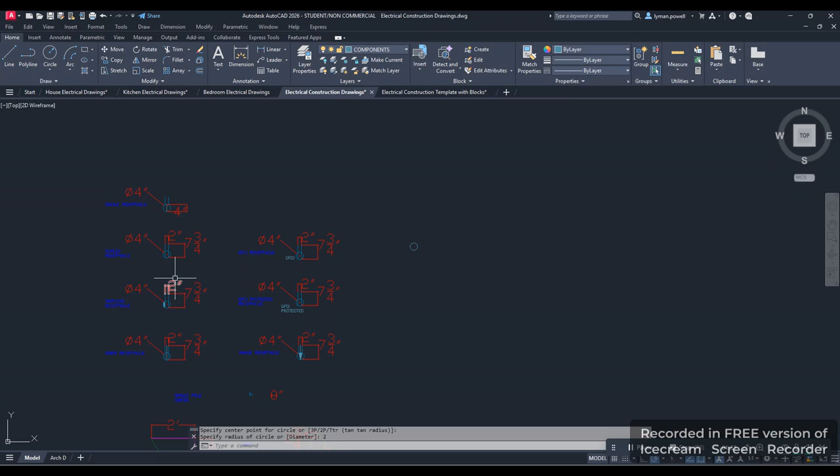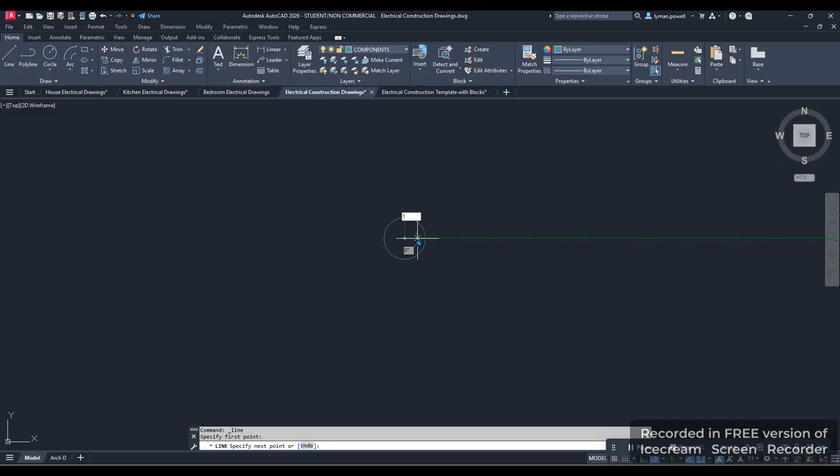Now you notice these lines here are 7 3/4 and they're 2 inches apart. So I want to zoom into this a little bit and draw some lines to help us orient our two other lines coming out of that. I'm going to draw a line starting at the center of our circle and go over 1 inch. If I type in just 1 and hit enter, I'll put my line at 1 inch. Then I'm going to go back in the other direction and type in 2, which will give us a 2-inch space between our two lines.

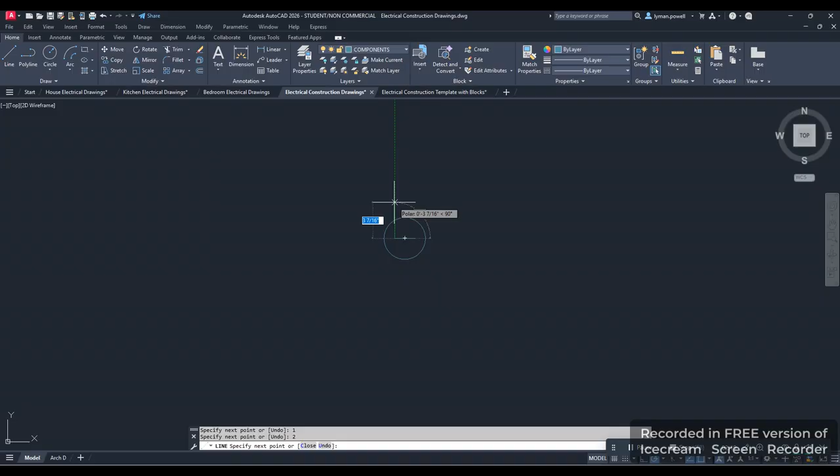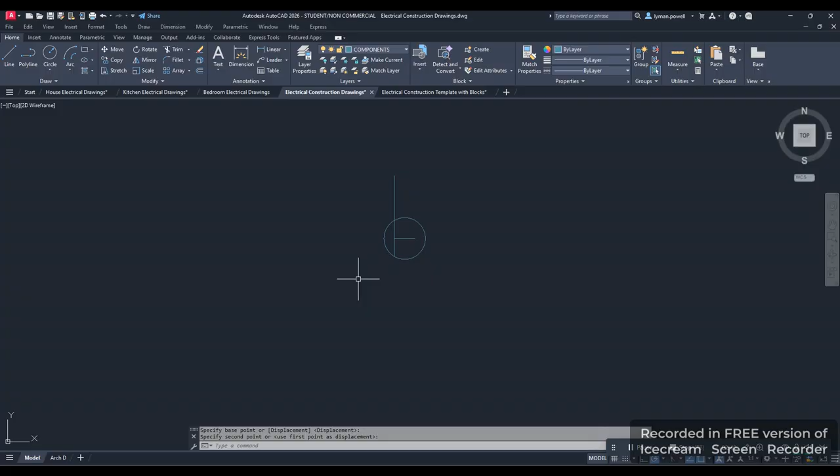Then I'm going to come in the vertical direction and go 7 3/4. I'll type in 7.75, which would be 7 3/4. Then I'm going to hit escape, but our line is not exactly where we want it. So I'm going to select our line and hit move, go to the end point of this line, and drag it straight down until we get to the intersection of our circle. That will be our first leg of our receptacle.

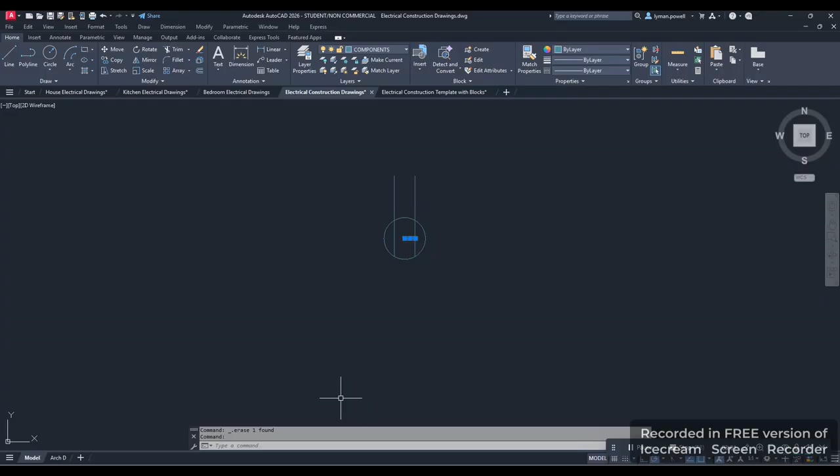Then I'm going to highlight that line again and hit copy this time, and go from one side of our original line to the other side, and that will be our duplex receptacle. I'm going to delete these lines that we used to get our spacing correct. So that is how we're going to draw our duplex receptacle.

Now, before we get carried away, what I want to do is make this a block so that we don't have to redraw it every time. We can just select our blocks from our block table and insert that into our drawing. So I'm going to highlight the receptacle we just made and hit create. I want to call this a duplex receptacle. And you notice my typing has not gotten any better since I started this course.

I have the object already selected, so you should not have to select this. You should have nothing else selected here. But it should be converted to a block, and it should allow for exploding, because we may want to modify it later. If we don't allow it to be exploded, we cannot modify it later. Then we're going to specify the point, and this is on screen. This is what we mess up on a lot, because when we click OK, we're not quite done yet. The block has not really been defined. So we are defining this as a block, but we have to give it a base point on the screen.

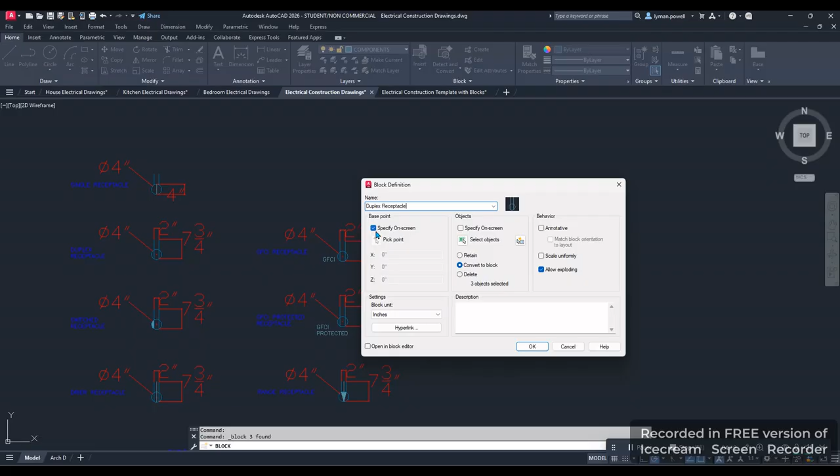So we have to hit OK, and you notice we got our cursor here. I want to select the end of our line here, and that will be where our block will be added to our drawing. So I'm going to select the end point, and now our block is made.

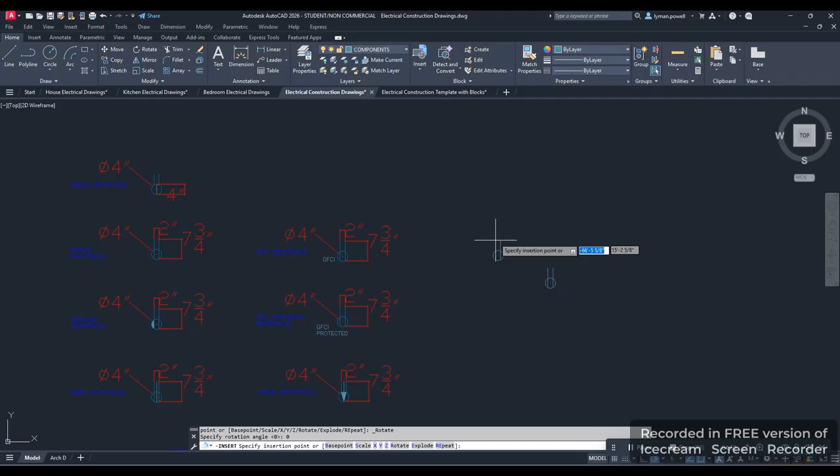And you notice when we click on it, that point that we just selected is where that block is going to be moved from. And you'll also notice if you go to our insert blocks, we should have a duplex receptacle there. You click on it and drag it, and it will go to that point that we had it selected as whenever we selected that block.

So once we have our receptacle created as a block, we can create the rest of these as blocks, or it's fairly easy to modify this to some of these others. So you can choose whether you want to make them blocks or if you want to create them on your own. But I will show you how to make our single receptacle out of this, and I'll show you how to do the switch receptacle.

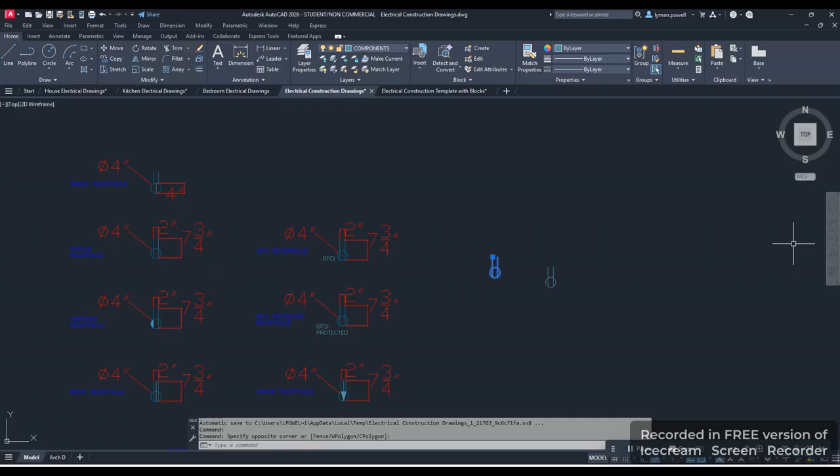The switch receptacle is really easy to modify. You don't even have to do it. So I'm going to zoom into this to show you how to make the switch receptacle first. You come up here to the top, and this is a fill, so we're going to fill this area. But I don't want to fill it as a hatch, I want it to be solid. So I'm going to click on solid. And that is all there is to do to make that as a switched receptacle.

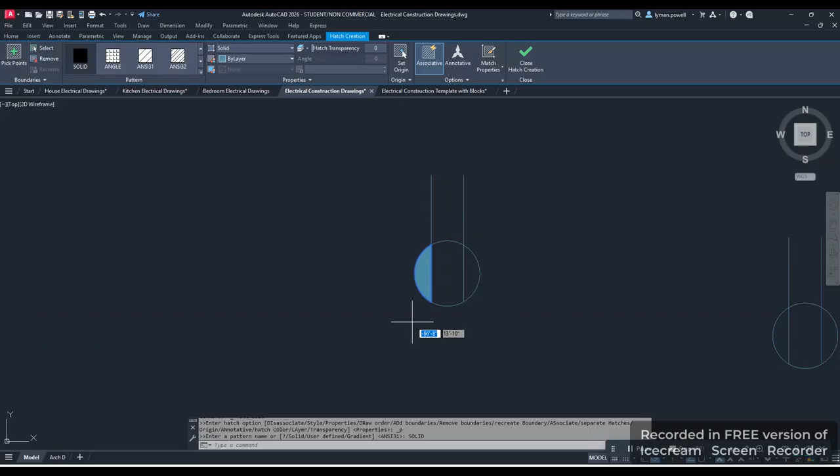Now we're going to make our GFCI. We can make a block for that, or we can just use a double receptacle and add our text to it to make it a GFCI. We're just going to click on our text, drag a box down here, and type in GFCI.

Now this should all be in capital letters. Whenever we do text in a CAD drawing, it should all have capital letters. So then we're just going to highlight that and come up here to make it a little larger. Half inch is not enough, so I'm going to do like 1.5 inches. I'm going to type in 1 and then a space. If you don't put the space in there, it'd be 11/2. So we've got 1, then a space, then a half. That will be our new text, and then we have to hit enter.

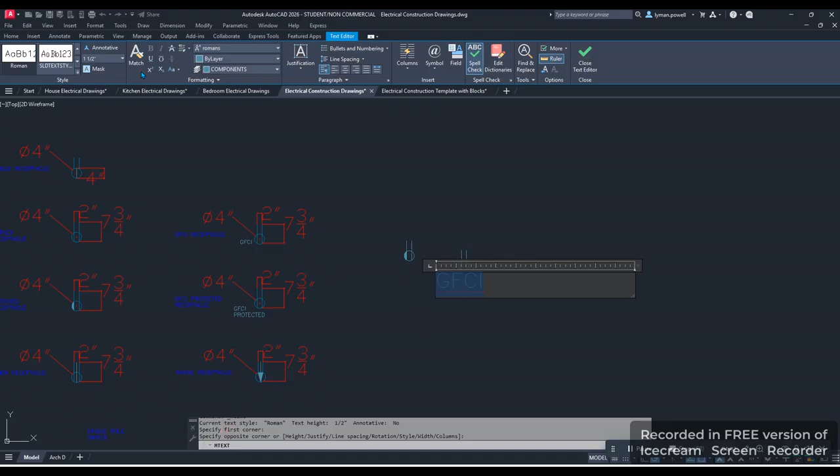That is why we leave out a lot of the time. So if you notice, the text hasn't changed. So when we hit enter, then it makes it larger, so then we can see the text. And then if we just click off of it, the GFCI will be next to our duplex receptacle.

Now, if you do want to make this a block, I would suggest taking this and moving it a little closer. It doesn't have to be oriented exactly, but somewhere close to that so we know it is a GFCI. And then if you want to make that a block, you can select the whole thing, or if you want to make just the GFCI a block, you can add that in there. But it's pretty easy to add when you do your drawing, so you don't necessarily need that as a block either, because it's really easy to make.

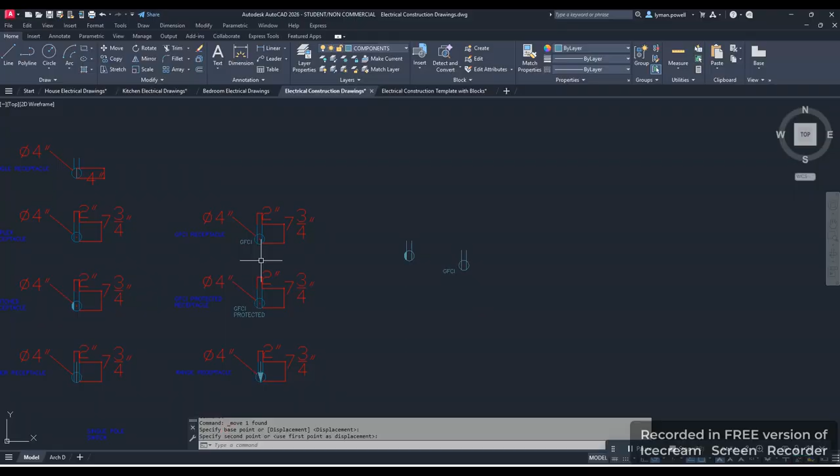And then the protected is the same thing. So this would mean that the power would come to the GFCI, and then you'd have a wire going from the GFCI to the protected circuit. So this is protected by this GFCI. So we made a switch receptacle, we made a GFCI receptacle.

I'm going to show you how to do the range receptacle. I'm going to show you how to do our 240 receptacle first. Just add an extra line in that. But you cannot just copy and drag this over. This line here is going to be a little longer. So I'm going to zoom into this one.

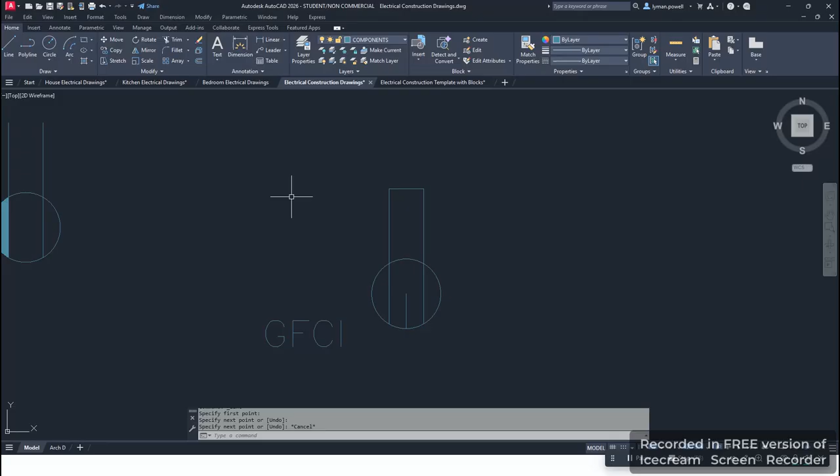And then I'm just going to draw a line, a few reference lines across here so I know how long to make it. We want to make it the same length. I'm going to draw a line from the center of our circle to the intersection of the circle. And then we can either draw another line or just lengthen this to the center of that line and delete that line. So that is a really easy way to make a 240 3-wire receptacle.

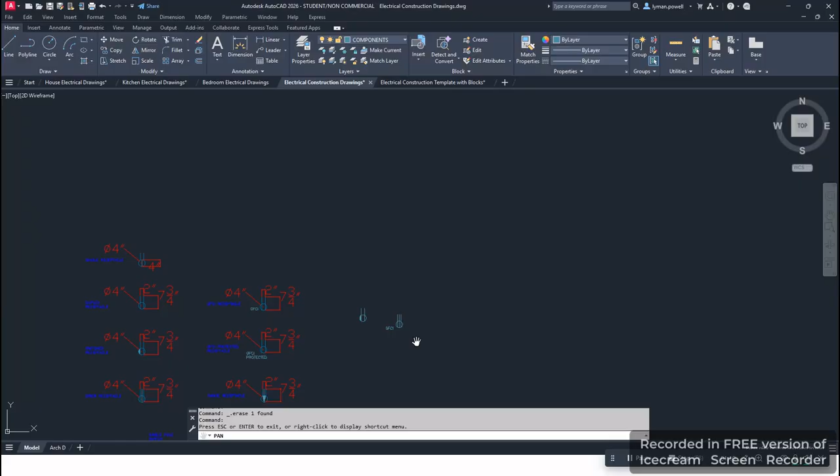And then if we want to do our range, we will just add our triangles to that. Again, I will zoom into this to show you how to do that. We will draw a line from the end point of this to where it is. We're going to go over that and then up. That's really simple, we're going to hit escape. And then again, we'll fill it. We'll click on the fill button, and we may have to fill 2 sides at a time, and it will be a solid.

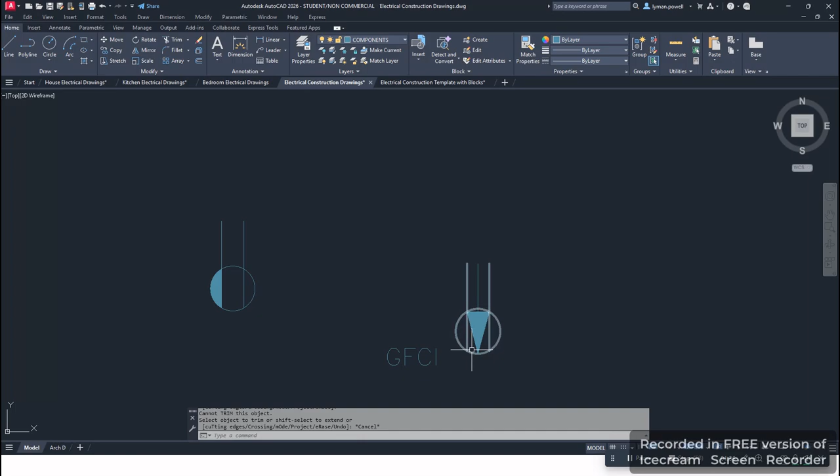We got to do one more step. I want to trim some of these lines out of that. We'll have to explode this first because it's already a block, and when we made that block, we made it so we can explode it.

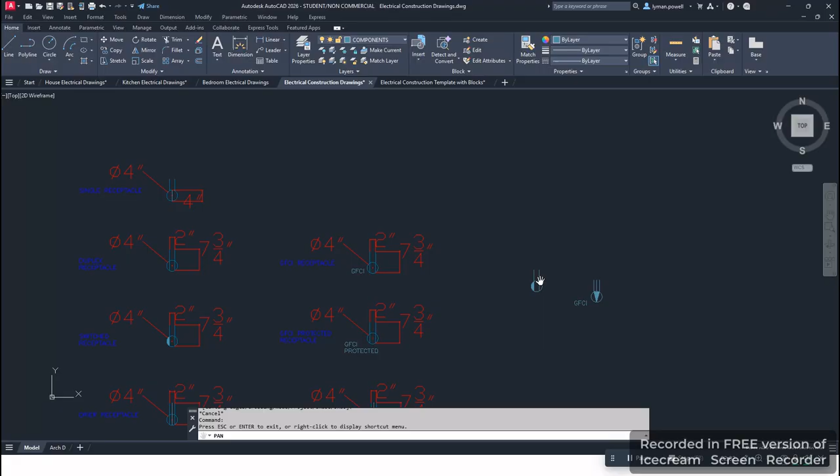So we will trim the inside of these lines, and now we have a receptacle for a range. That should be all of the receptacles that you would be able to modify. You can modify this one, you would just have to trim these 2 lines on the outside and then draw a line in the center of that. I think you'll be able to figure out how to do that.

So we're getting to the point now where I want you to start figuring out how to do some of these blocks and how to do some of this stuff on your own. So I would like for you to create these blocks, or at least be able to modify them to get them to do what you want. Okay, so we made our receptacle blocks.

Now I want to show you how to do some of our wiring blocks. Our receptacles are going to be in the components, but then I want to do some of this wiring. I want to add that in our wiring layer. You should have the wiring layer.

I will let you choose the color you want, but I'll just warn you, if you do too dark of a color, it doesn't show up here very well. If you do too light of a color, it's not going to show up over here when we do our layout. So you have to kind of pick a color so that you can see on both sides.

As you notice here, our home run is 2 feet over and 1 foot down, and then we got an arc going from one side to the other. And then I have a 2 conductor symbol here, so this would be like a 12-2 or 14-2 or some kind of wire, and this dot would mean that it's with ground.

And then I have a 3 conductor, so this would be like a 12-3 or something that might be used for a 240 volt service or for a 3-way switch. So we can probably make both of these blocks, and I'll show you how to make the block and add it into our wires as we go.

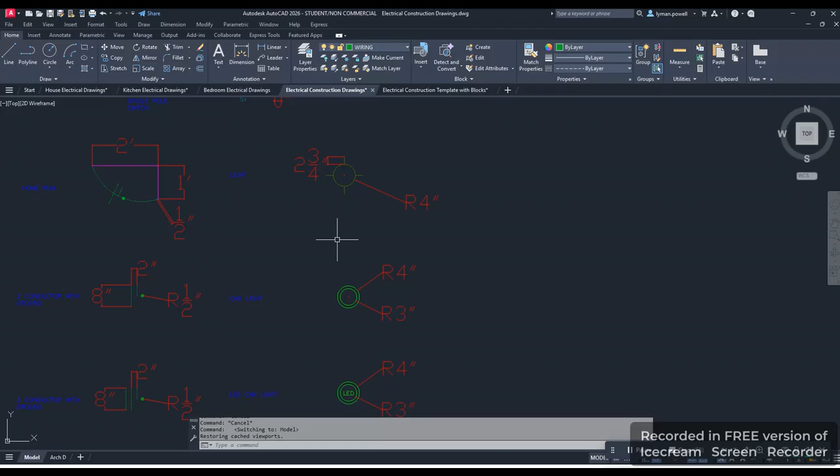I'll show you how to do the home run, and then I'll kind of let you figure out how to do the lights on your own. This is a can light, it's just got 2 circles, and it's very simple. And then the LED light is just the can light with an LED inside it.

But I will show you how to do the home run in these 2, and then I'll let you figure out how to do the rest of them. These lights should be in the lighting layer, and this should be in the wiring layer, the wiring label.

So we're going to start by just drawing a construction line. We're going to come over 2 feet, so we're just going to draw a line. I'm going to type in 2, and feet is just a little apostrophe.

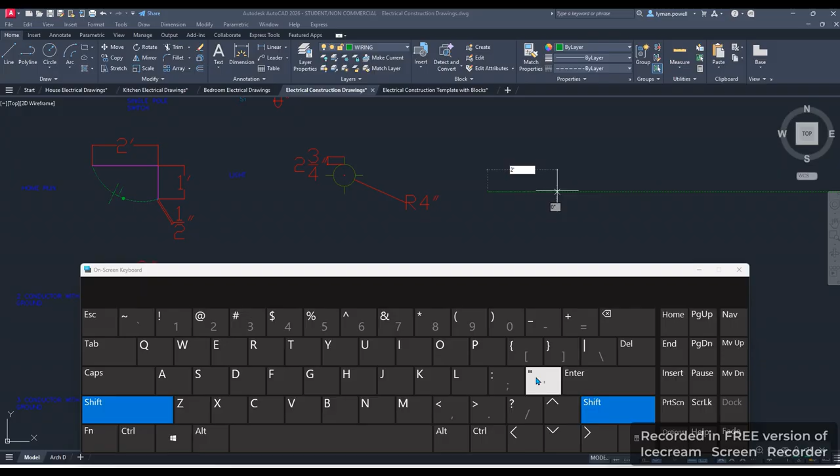I do have a keyboard on here to show you where this is, so this is just feet. If you want inches, you have to hit shift and then the quotation mark just for inches. If you don't hit shift and hit this, that is for feet. So we want to come over 2 feet, and then we're going to hit enter, and that's going to be our line. So 2 feet, enter, and then we're going to come down just 1 foot and hit enter.

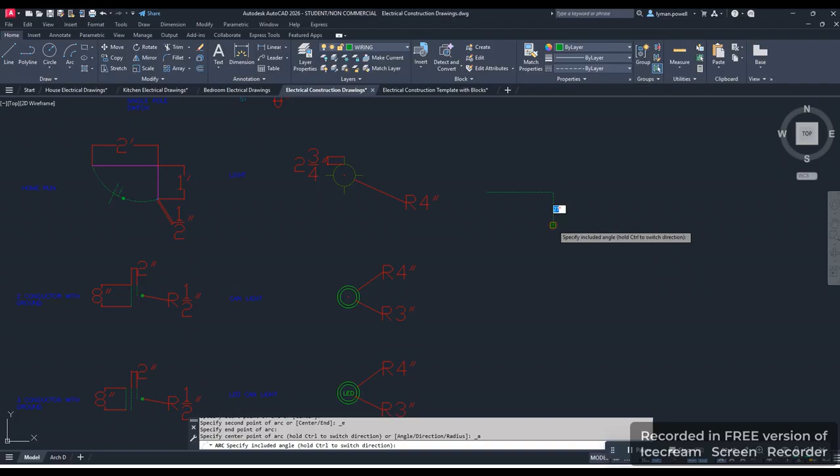So that will be our lines to lay out our arc. Whenever we do this arc, I want to come up here and select - this may not be selected for you, you may have just a 3-point arc. I want to do a start, end, and an angle. So select start, end, and angle, and then we're going to start at this point, end at this point, and then we're going to have our angle, and it's just going to be perpendicular to our line. So that will be our wire for our home run.

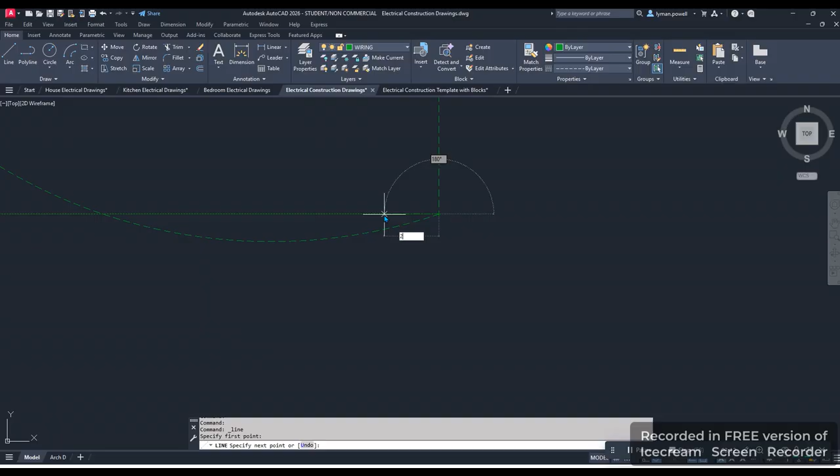Now we want to do a little arrow on the end of this home run so that we can tell that it is a home run and not just a wire. So again, I'm going to zoom into this, and I'm going to select just a wire, and I'm going to come out - now we made this on our horizontal plane. So I'm just going to make this a wire that's going to be 2 inches long. So again, I'm going to hit shift and then the quotation mark and then hit enter. So now we have the start really of our arrow.

So to finish it, I'm going to highlight it, and I'm going to do the mirror image of that, and I'm going to select the end point, and you notice it puts the arrow down on the other line, on the other side here.

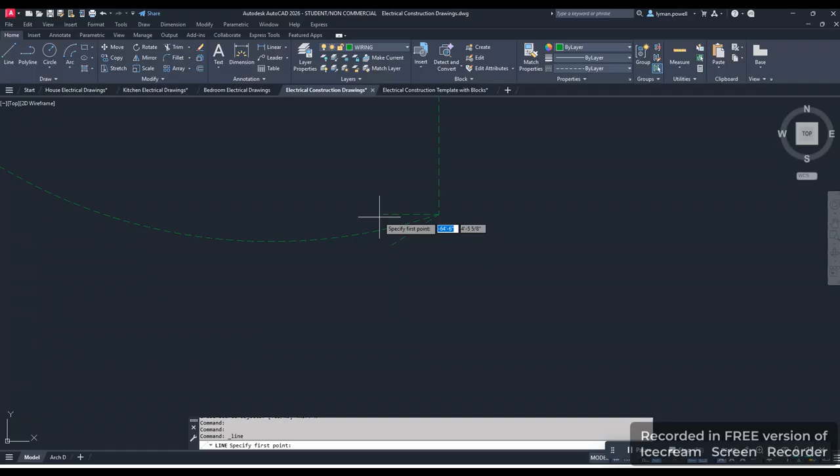So if you get it perpendicular there, then you can draw your line. I do not want to erase my source, so I'm going to hit no. Then I'm just going to make another line here to complete my arrow from the end of this to the end of that, and then we'll do another fill, and I'm going to fill in the solid. I'm going to fill my arrow. So that will be our arrow for our home run.

You can make this as a block, but I would like to add our wire numbers here so we can distinguish what line it is. I have given you some dimensions in that, and I'll show you how to draw that real quick.

So we're just going to come out here and draw a line 8 inches long, so just type in 8 inches. And then I want a 2-inch separation between these 3 points. So what I'm going to do is come up here and draw a line. I'm going to go from the center point of the line we just drew and drop in 2 inches, and I'm going to do another 2 inches for our circle. Hit enter, and that will be our 2 lines.

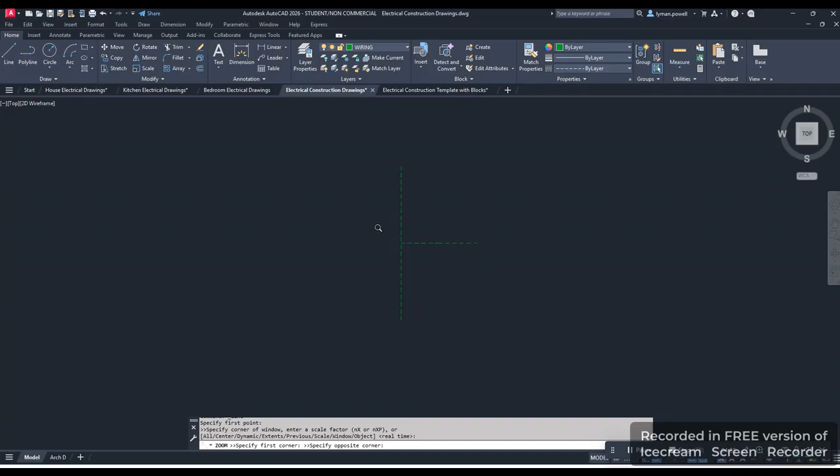In this first line, that's going to be half of 8, so I think we can figure out that's going to be 4. That will be the end point here. Again, I'm going to zoom in to see where that is. So we're going to go in and up, and that's going to be it.

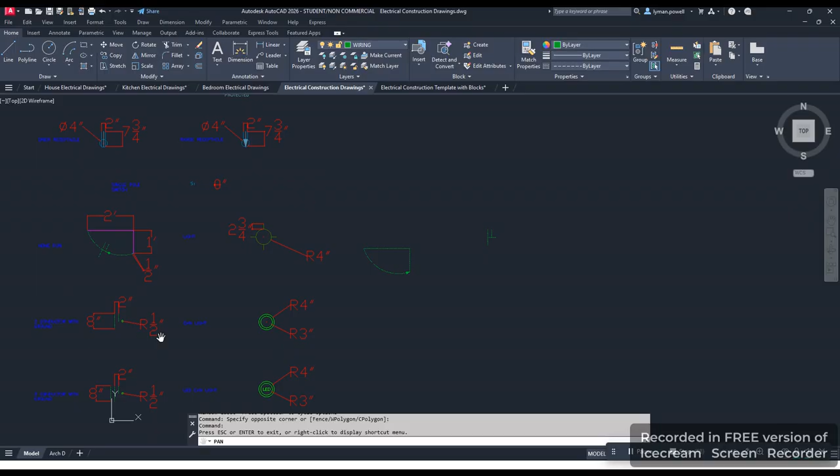So then all we have to do now is add our circle out here at the end. If you go back to our dimensions area here, we can find out that the dimension of that circle should be a 1/2 inch radius. That's pretty simple here, you just click on the circle and click on the end. So a 1/2 inch radius would be just 1 divided by 2, and that's all there is to that.

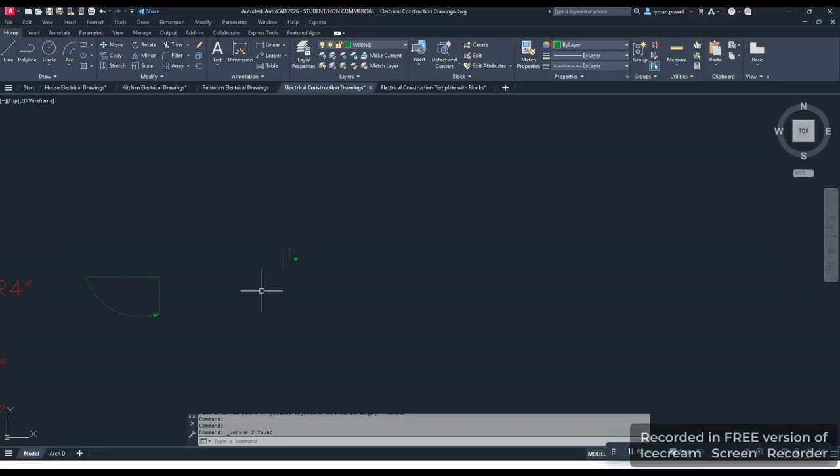And then I do want to fill that in with a solid circle, and then we can delete our 2 construction lines, and that will be our 2 conductor wire. Again, I was just making this a block because we will use this a lot in a lot of our wires. So our home run will be about the same dimension every time, but sometimes we go from a light to a receptacle or receptacle to receptacle, and we will have to make those wires individual lengths.

But I will show you how to put our conductor size, what conductor we need, into our home run here. So again, you will make this into a block and call it maybe a 2-wire conductor.

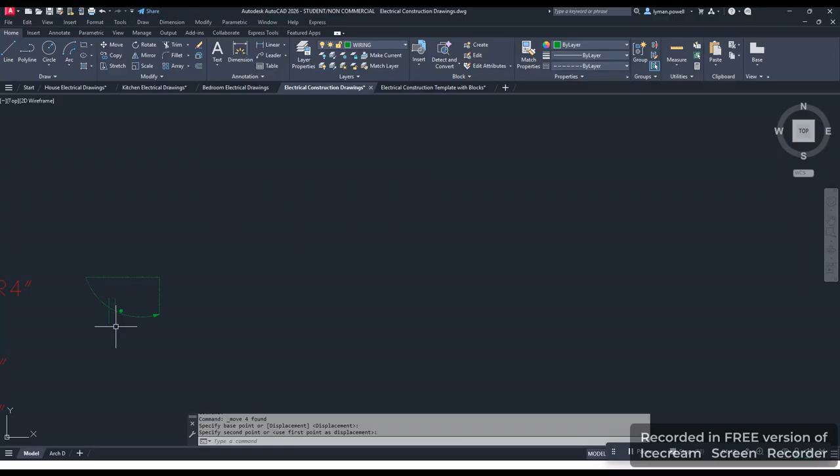I'm just going to highlight this now, and I'm going to move it. I want to move this to the center of our arc. And you notice it's not oriented correctly. So again, I'll zoom into this so that we can see it a little better.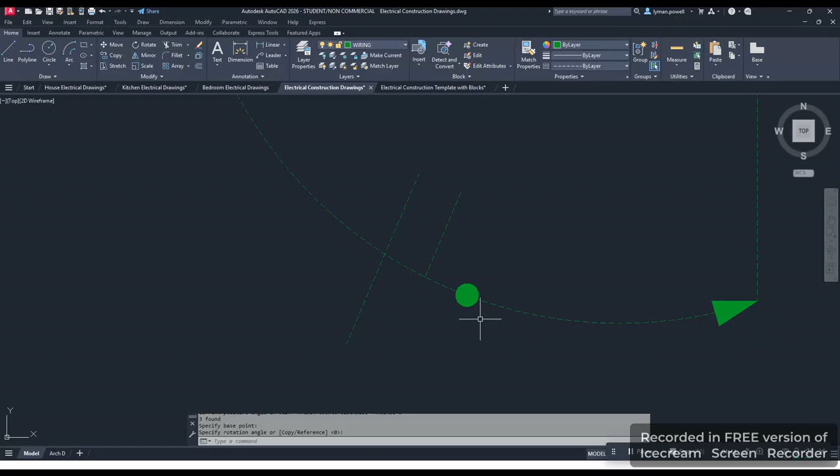But what I want to do is highlight our home run, and yours, if you make this a block, that will all just be one point. And you select on this. So I want to go to rotate, and I'm going to click this point right here that we're going to rotate it from. Then I want you to rotate it so the center of the circle is just in your line. We can eyeball this as best we can, and then that will put our arc in our line. It'll be in the center of our radius, so that will really complete our home run.

And that will be the way we draw. You can save this as a block for your home run, and I would save this as a block as well, so that we can add that to some of our other circuits.

And then it'll be really easy just to add another line here for our 3 conductor, and I would go ahead and make a block for this for our 3 conductor. So go ahead and try to make these blocks.

You'll make one for the lights, the can lights, the LED lights, and you might make one for the switch. This is just a switch 1. This is 1.5 inches, and that is 1 inch. So whenever you do your text, you'll make the S 1.5 inches, and then the 1 a 1 inch. So we'll have a little sub thing there, and that is just for a single pole switch. Later on, we will do a double pole switch for maybe a 3-way circuit or something, but that will be how we do our single pole switch.

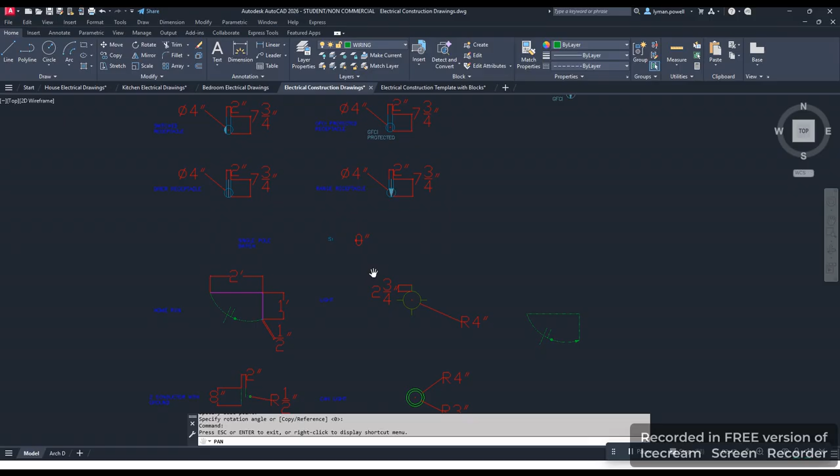So we'll make these blocks, and then I'll show you how to draw some of our drawings, and then I'll let you figure out how to do the rest.